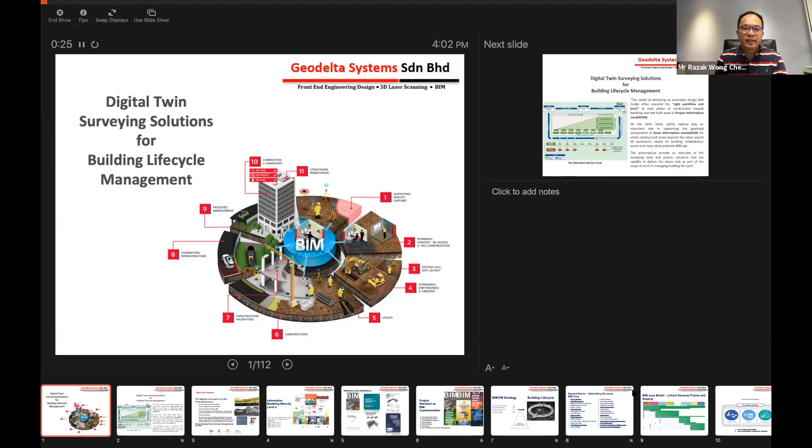For that matter, I think the picture in front here tells... As you can see, Mr. Razak, what we see is two or three, it's not a full screen slide. What do you see at the moment? See next slide, click to add notes. Oh, okay, just a moment. Maybe the screen share is not the right screen share. Just a moment. Let me share it again.

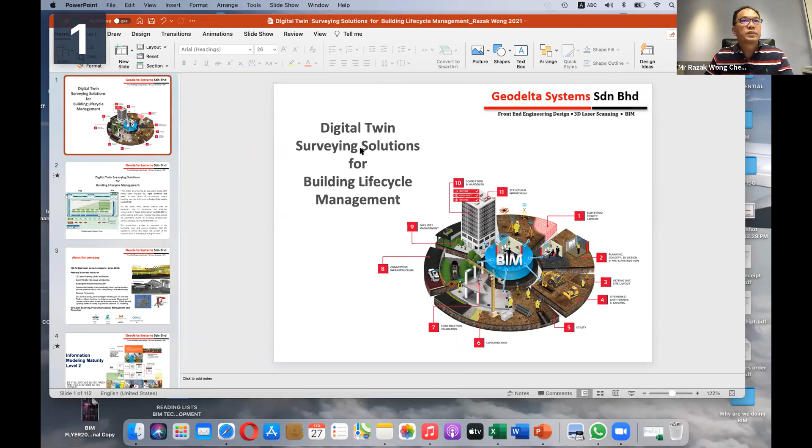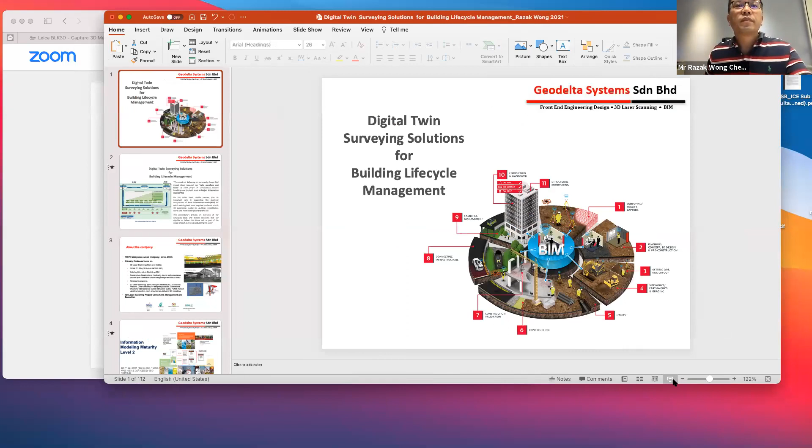Do you see the bigger screen? Yes. Okay, right, so you got a full screen now, yeah.

Right, so to the subject we are discussing today, I'm trying to relate surveying tools with the construction phase itself. You can see the numbers there, from planning stage all the way to design, up until construction and delivering itself, right? So how would surveying tools nowadays be able to assist, in terms of a typical modern construction, in terms of digital twin matters now.

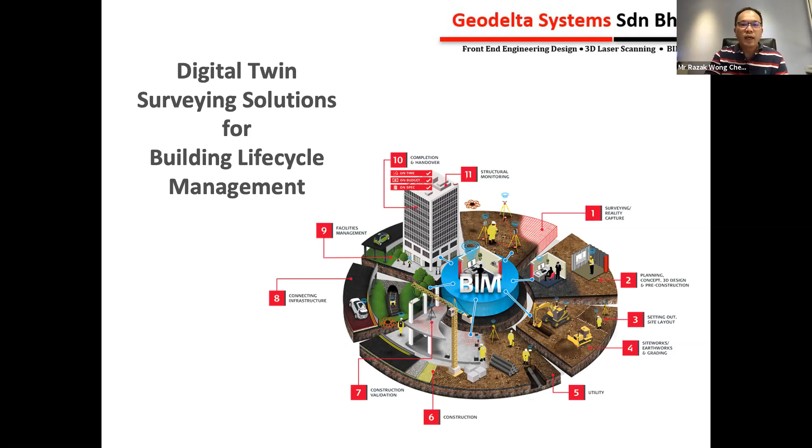Now in terms of deliverables, we have PIM. PIM in BIM terms is a project information model. Basically we're talking about a model with information itself, with the database, right? That's during the construction site itself. Now with that, we also have AIM, which is the asset information model. Now why I mention these two specifically is because...

I think for modern buildings, delivering a design model is not the problem, because we have all the digital design done in respective parametric modeling software such as Revit, ArchiCAD, etc. But then PIM itself, bear in mind, sometimes projects require as-built LOD 500. So how do we verify on that?

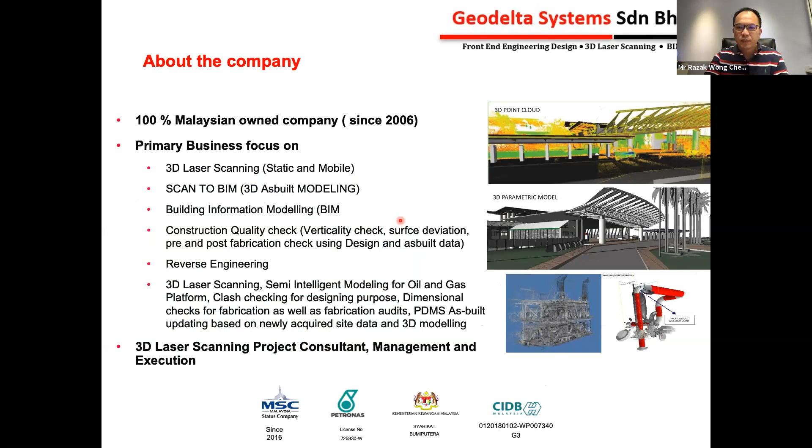Now, along the way, we also base our work on international standards. Also, we base it on some regional standards as well, and our local standard JKR. We are trying to converge the requirements so that we are tallying to the construction phase.

How it works? So, next slide. Now, first thing first, nowadays if you want to deliver a project, we need to have a strategy. Same goes for the tools that we use. Let me go down one by one. When you want to build a building, you will have an organizational strategy.

Then, after you build it, how would you like to utilize your asset? So you also have your asset information requirement for that. Then subsequently you come with your BIM requirement. You have your BIM requirement - LOD 100, 200, 300, construction model 400, all the way up to as-built 500. Then subsequently you have your asset information model.

Now come to here itself, how we deliver. Now then we talk about the construction life cycle itself. I would try to use it based on the BIM use. BIM use will be very common to the industry. We have lots of BIM use - so these are the list of BIM use: 3D coordination, asset management, etc, everything here.

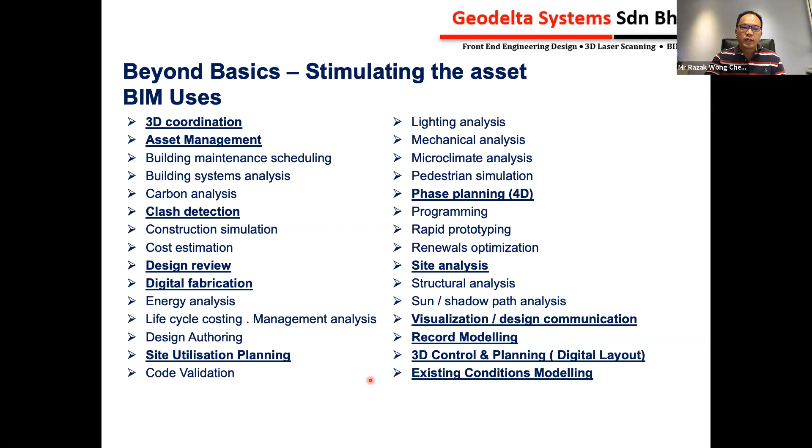From here, that's why I think along the way, in terms of the life cycle, this is perhaps where there are some tools along the way that surveying tools can come in.

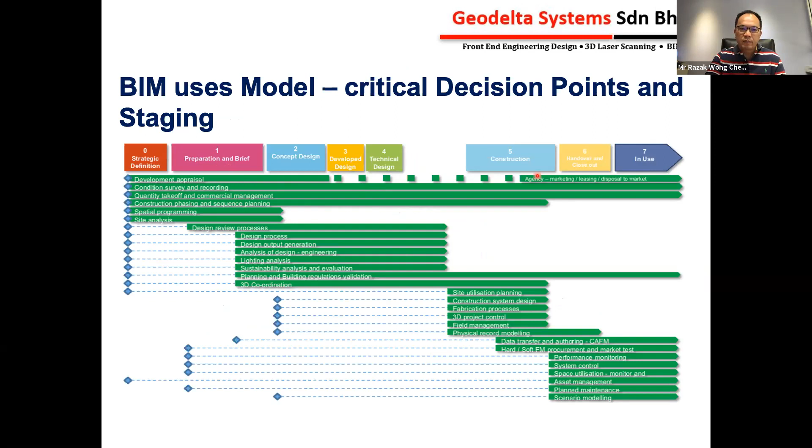Now, again, why I talk about the life cycle - BIM, I think we deal with three types of information. There will be graphical, the database, and documentation. So today, the surveying tools is addressed more towards the graphical model.

So we're talking about level of detail, because in our real world sometimes it's too complicated to model everything. So we need to be selective in modeling, because at the end of the day it's about cost effectiveness.

We have different levels of detail, and we had to choose one. In our past experience, most of the scanning itself can be done very thoroughly and quickly, but for modeling we normally choose a level of development. I mentioned level of detail up to 300, based on practicality and cost effectiveness, so it won't be very costly for project development.

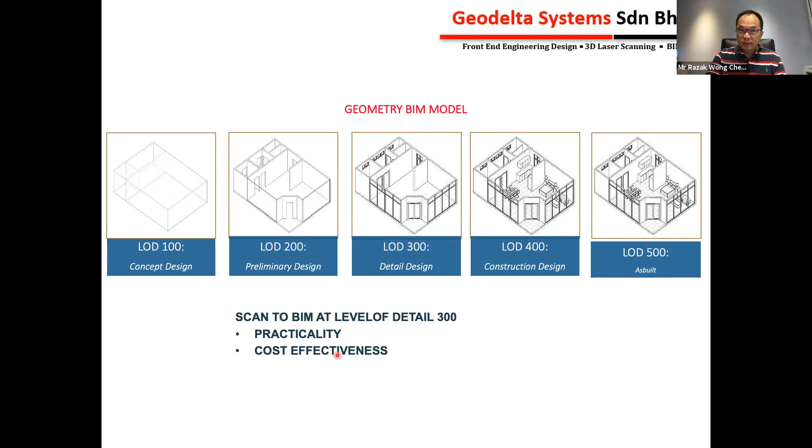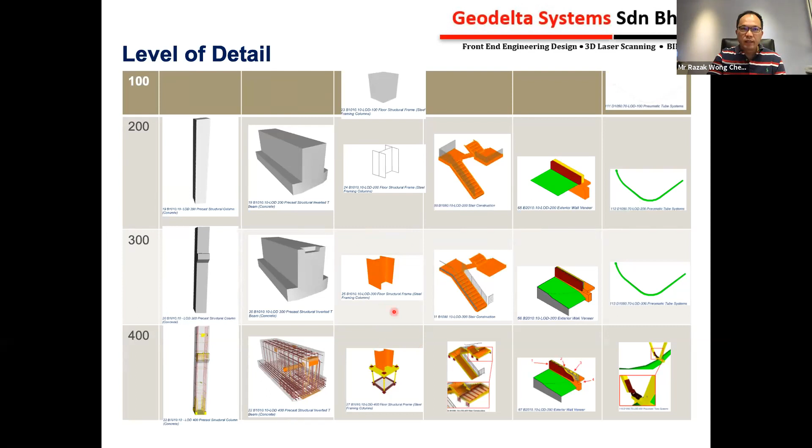So here are examples of why we choose 300 - it's enough to represent our real world environment. Not too simple, not too complicated, but just enough for engineers to work with. So there will be some examples of level of detail.

Today we're going to cover five major topics based on the respective construction phases, as you can see the whole construction phase here. I'll introduce some software that we use internally, so we find it, we are very familiar with it. That's why I mentioned the Autodesk products.

Then this data will come into the planning stage and design stage, where the architect or engineers, based on the landscape, perform the analysis or design.

Now the surveying tools come into play during the setting out stage, maybe grading, layout, building, and so forth, and also utilities, cables, power, and so on. These are the tools we'll be using along the way, so if we define it properly, there should not be confusion.

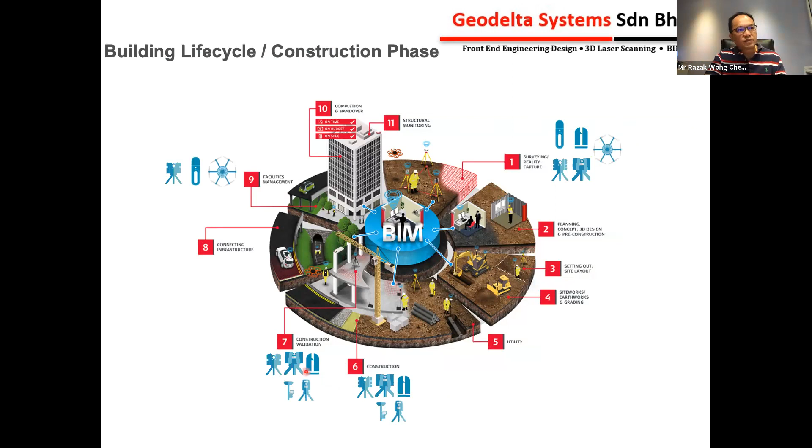Okay, quickly go on that. Now, this is what I'm trying to mention here. Scanners can be deployed during the early stage, during construction, validation, and FM side, for automation. Now, how does it look like?

This is the scanner. We have different types, I would say toys, because we have the backpack type if you want to go very large scale. We have the one on the tripod side itself, which can go up to 1 kilometer of scanning distance. This is all done in Malaysia.

We have this kind of picture, about 2 minutes scanning, 2 million points per second, a sample scan in our Shah Alam stadium. We also have a lady holding a very lightweight scanner, you can see a lady also can do the scanning, very easy with the tripod.

This scanner may need guys to carry, it's 14 kgs, a bit heavy duty. But for this other scanner, it's very light, just 1 kg itself, so ladies can go in and do scanning to do verification. So it's equal gender for that, right?

And we also have the handheld scanner, lots of toys. This is maybe for large scale mapping, for mobile scanning itself. Now the next picture I'll show you, so-called a quick one.

How it functions, a bit technical here. It's able to collect thousands of points per second, and able to rotate 360 degrees, moving 360 and 270. It's got a camera, and has a very short scanning time. This is for the static scanner, you see it on a tripod. This is the type, and these are the various ranges for that.

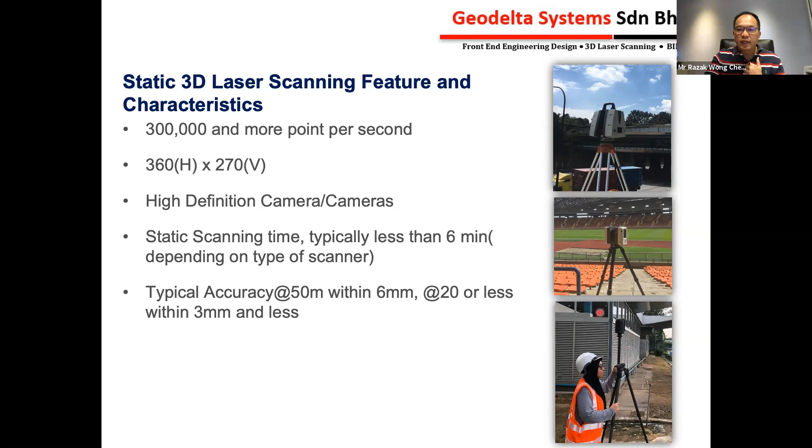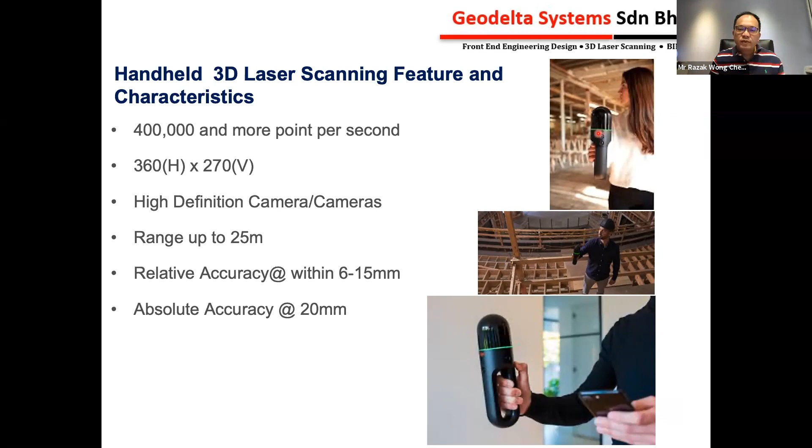Then we have the handheld type, which is a new technology. It has got the IMU inside, you can see a lady holding it, very lightweight, you can walk and scan itself. So you can scan the entire floor very quickly. This is good for maybe air networks, whereby they want a quick layout drawing.

Then we have the large scale, more canggih scanner, whereby if you want to go for a larger scale, we can run like 50 to 60 kilometers per day. So that's for infrastructure type, if you need that. But mostly our experience is dealing with static scanner and handheld scanner.

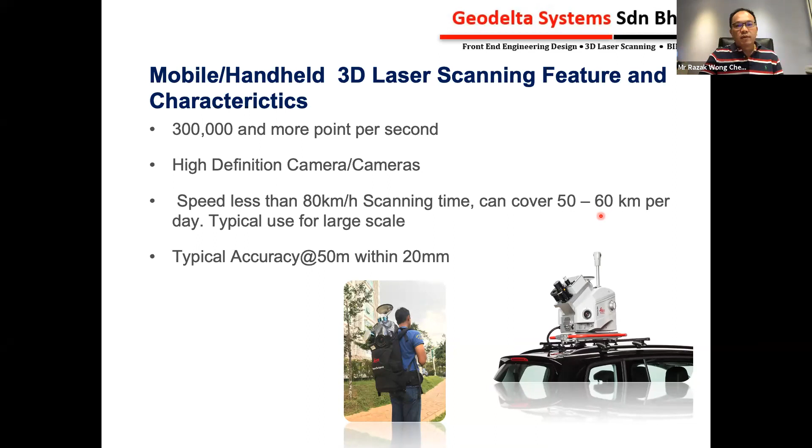Right, skip that part. So these are some pictures I'd like to share with you. On the left and right-hand corners, this is basically a scanner result, scanned with color pictures, just like Google Street, right? So basically you scan and this is what you get, because it's superimposed with the photo, and you see, wow, you are in the location itself to scan it. Now from here, we will be doing the modeling, almost there.

Okay, we have the so-called structure, the walls, the piping, the floors. This one we do generically because we don't do the detailed modeling itself, because maybe LOD has a different definition. On the right hand side, the cooling tower itself is almost the same.

This is the site, and this is the model. So if you have any projects come across that need scanning, this is the mechanism you need. You can go and scan it, scan lots of points, come back and deliver it, maybe do the analysis work itself. Very useful for that.

This is, in fact, an airport overseas. We scanned the entire airport, almost about 700,000 meters square. It took us about 2 years to complete the project, covering all systems like architectural, structural, and also the M&E side. So we have good experience to share, more practical experience for that.

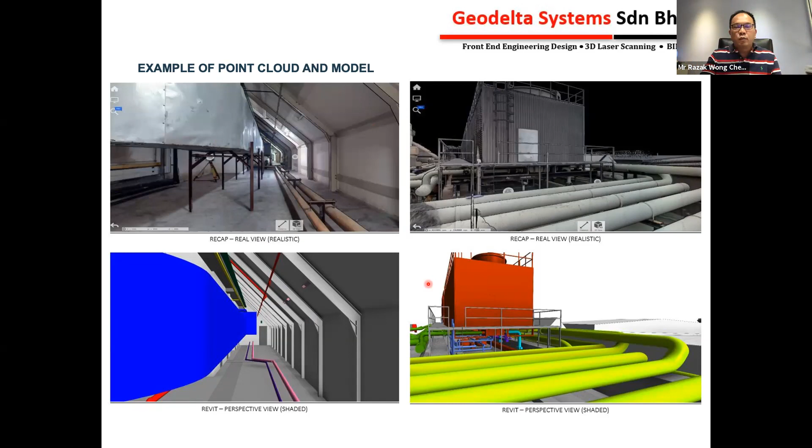On the heritage side, we are also very keen because Malaysia is full of multicultural places. We have opportunities to scan places like mosques and temples. You can scan it with the new tools and software, and then embed it to make it like a virtual tour itself.

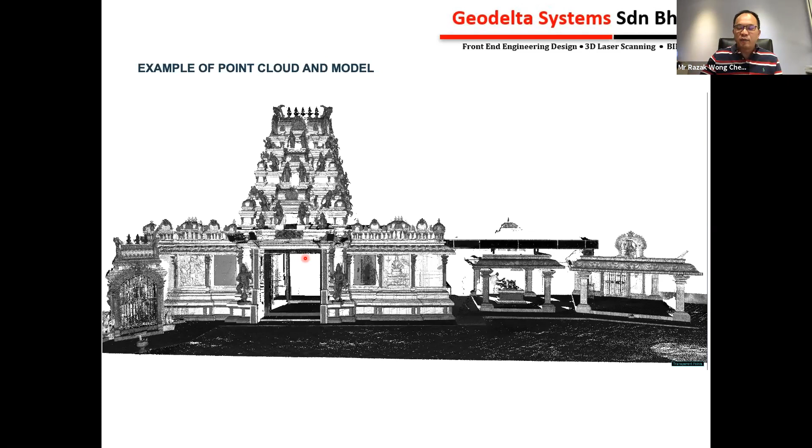Especially during pandemic time, with no place to go, I suppose we can put this up as a virtual site. Perhaps that will promote and attract more tourists to our country later on, in preparation for post-pandemic. I really hope so. And then at Tugu Negara, we can scan that as well.

This is on the left-hand side, and this is the scanner result that we have scanned to come with that. In fact, this can be modeled out from there. Now let's talk about shipbuilding.

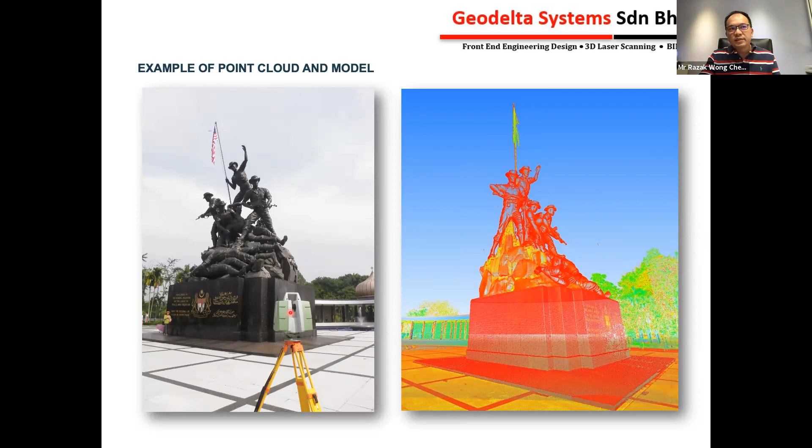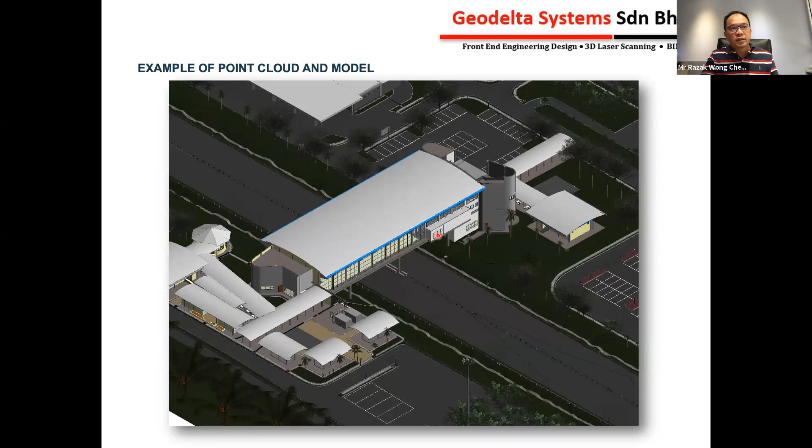For Malaysia side, we have a lot. This is an example for Plus. We have scanned a couple of R&R buildings, inside and outside, and this is actually derived from the point cloud. You can see the rooftop, the structures, the mirrors, walls, and so forth, all derived from the scanning results.

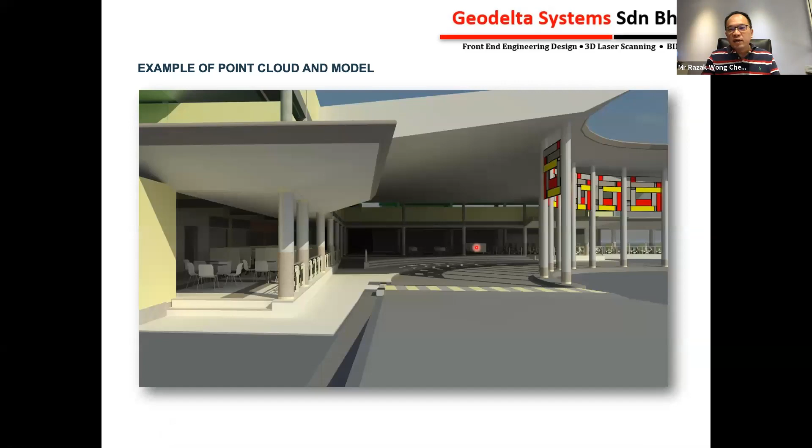Now subsequent examples can be enhanced. I'm sure this may be familiar. This one is somewhere in Sungai Buloh, an R&R. If you drive there, something may be familiar. I think as Malaysians we may be familiar with that. This is some spot.

Same area, inside the cafeteria. And this is another area in class. I'm sure you're familiar with it, from the walkway coming here to the surau area and toilet area. This is what we derive, and this is also somewhere at the Seremban area itself.

Doing scanning, you can get the ceiling and the so-called interior structure, including mirrors and so on, based on the real-time current setup for that. So this is very typical.

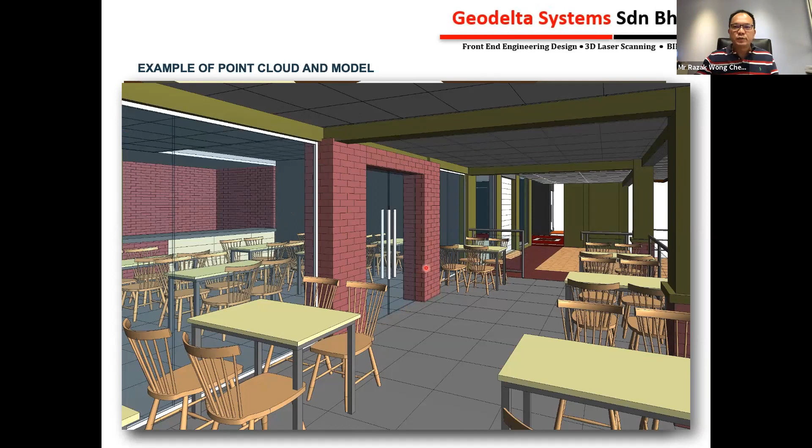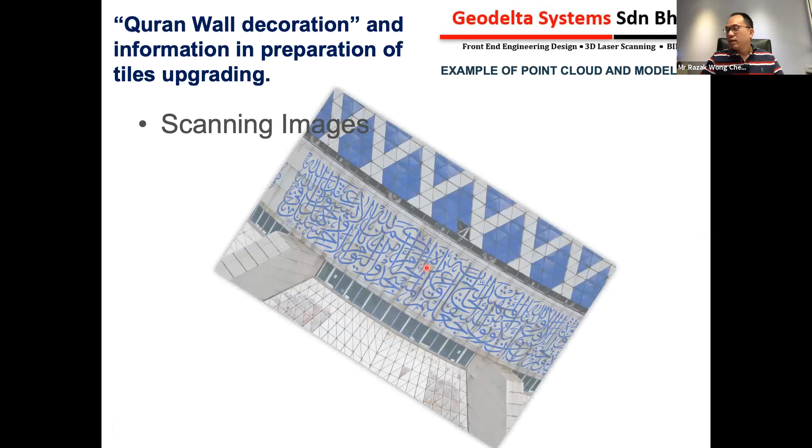Now the next example, which is very interesting, is the Quran decoration in Shah Alam. I'm sure this is also very famous, familiar for us. This was back in about 2014 or 2015. I think the problem was they didn't have the as-built drawing for that, so we deployed laser scanning.

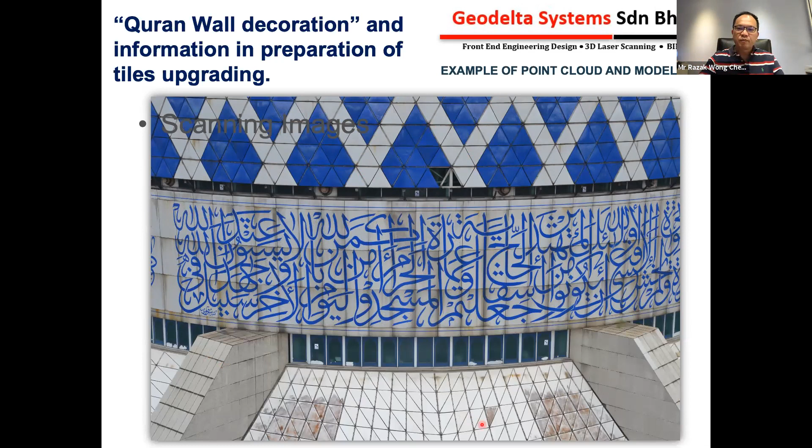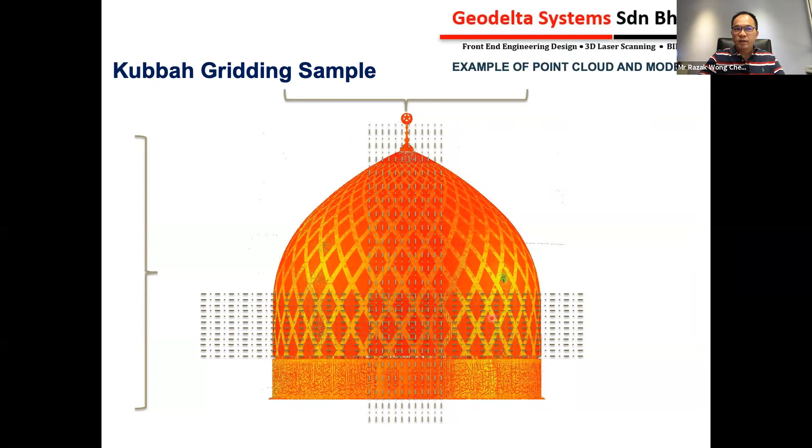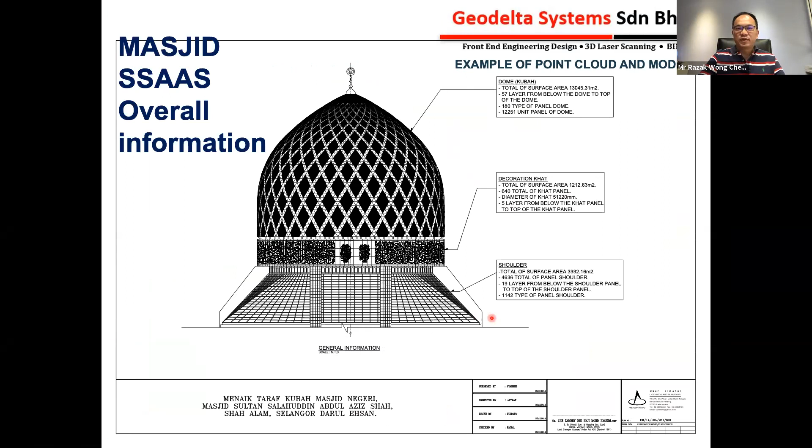And then this is where the panel - you can see that? The panel is how we derive the panel drawing itself with the so-called pattern. That matters. And then this is the whole entire dome, the masjid's dome, that we are trying to do the gridding system for, deriving the position, and finally coming up with the execution drawing for that. This is for Malaysian examples, not somewhere overseas, so it's something we're proud of for local examples.

And some other examples, like a school - you do scanning, then you do the so-called architectural drawing. This school wanted to do expansion but didn't have the drawing, so we scanned it. At first they wanted to do a traditional survey, but it's impossible to get this kind of detail. So we deploy a scanner, and then we draw elevation drawings and section drawings based on Revit, and derive the 2D drawings.

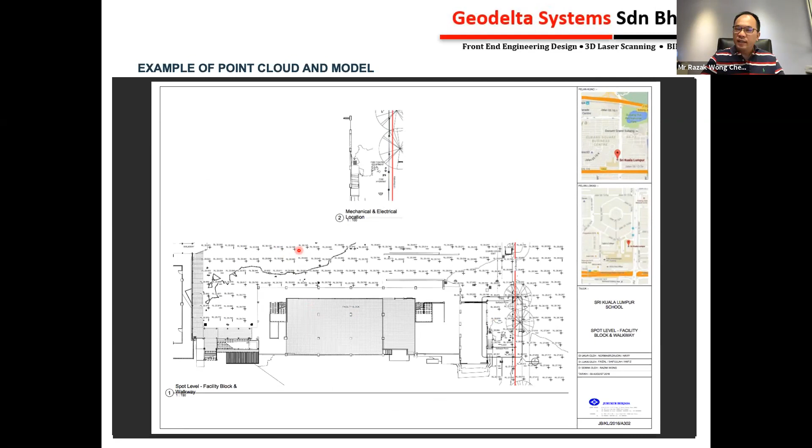And of course you can see this topographic data - we didn't survey this because we got it from the scanner point cloud itself. We can do up to half a meter contours, one meter upwards, very easily. Most importantly, we are no longer dealing with 2D - we can deliver our design in 3D because it's all done in Revit.

So with that, I would like to share with you a workflow of how we deliver from point clouds to 3D modeling. Just now was to give you a flavor of how it looks, a quick preview first. Now let me share with you how we actually do it.

So we would utilize scanners, do the location scanning itself, then survey it so we have a proper coordinate system to merge properly with the boundary and so forth. Then we process the data, merging all the files because we've got so many scan points - sometimes one building would have 300 to 400 scanning points, and the data size could be up to 1 terabyte. It's pretty big - we're talking about big data and analytics, but applied for architectural and surveying purposes.

With that, we would do the modeling according to the project requirement. For example, we have architecture, structures, or M&E. Every project, if it can be defined in terms of requirement, we will deliver accordingly. Mostly the projects we deliver up to basic architecture and structures because clients say they just want a layout, a quick survey.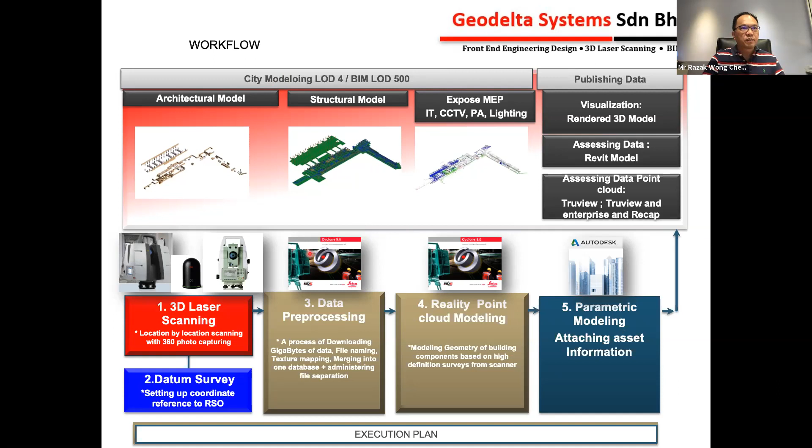So this is how we deliver the workflow, in terms of step by steps, pictorially. We have a site, we scan it, we merge it, we model according to the point cloud - here you can see it's either structures, interior, special equipment, or M&E. Finally, we get the results.

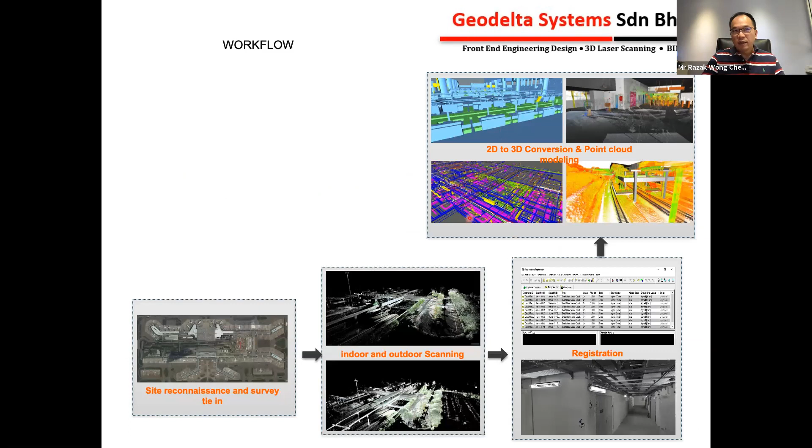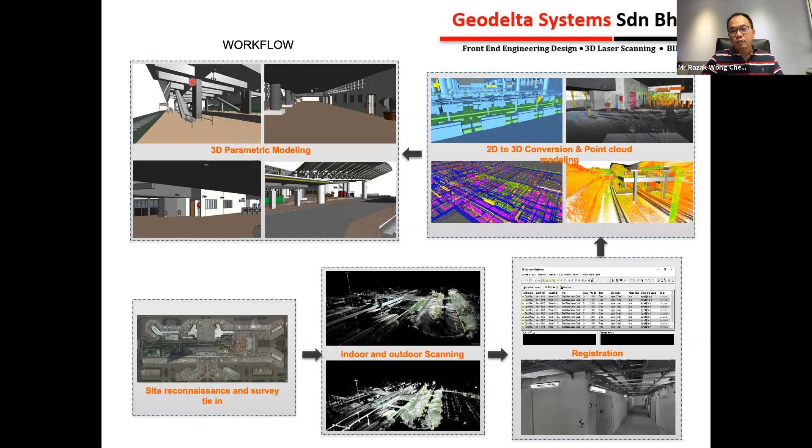So think about it, this comes to managing your asset itself. We scan it, we get the catalog, we build the catalog itself, then we can deliver as a BIM model for FM purposes. Okay, so that's a good part of that.

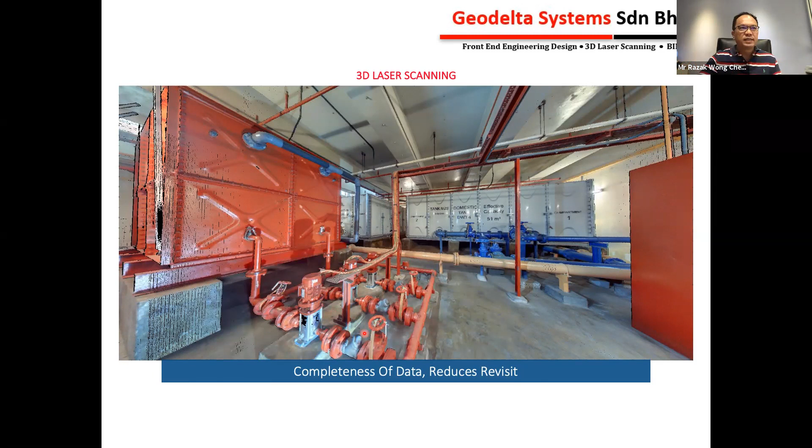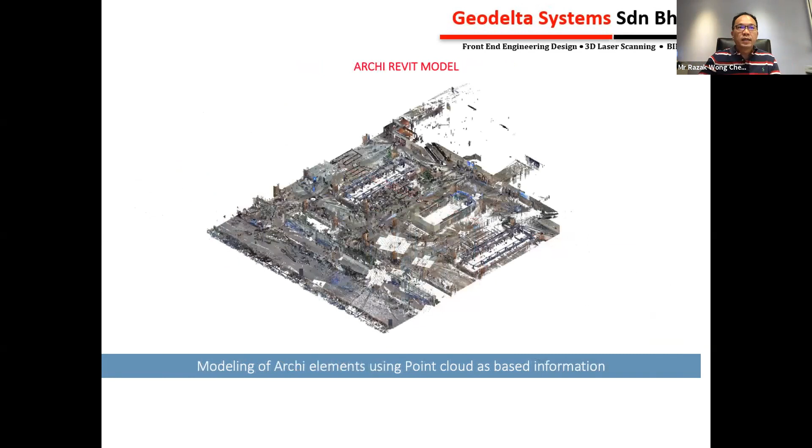This is a door example. Scanning, we model it, then we have the model. Subsequently you can do more enhancement in terms of making it more colorful and so forth as an alternative. Now try to show you this is the point cloud, how we model it - you see, this is the results.

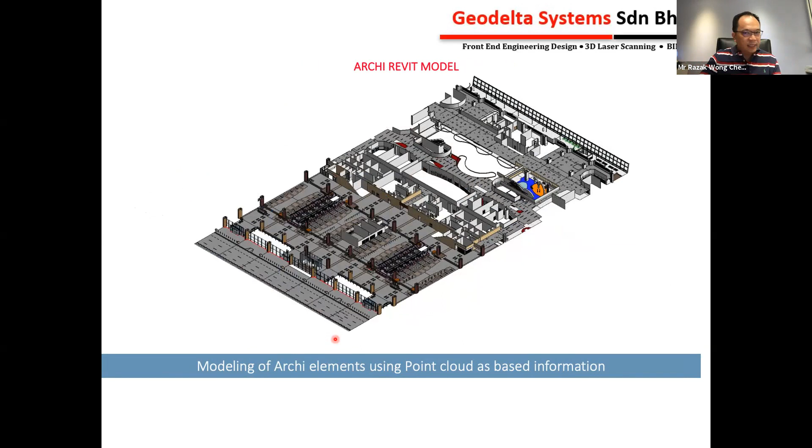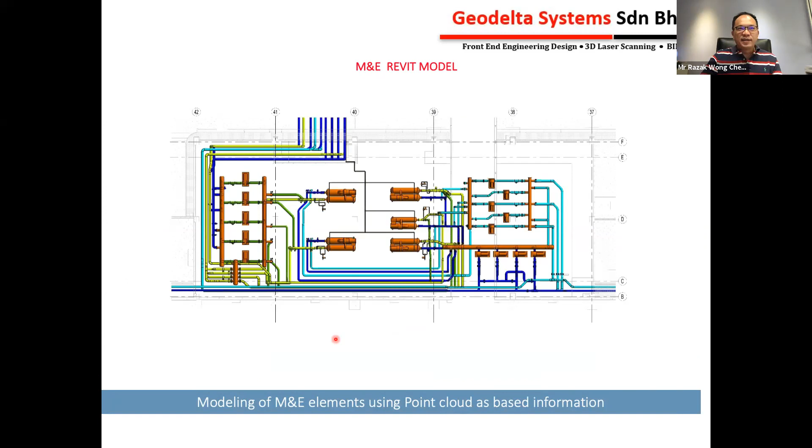So these are the pictures - you can see this is the external part of the airport itself, been done by scan to BIM.

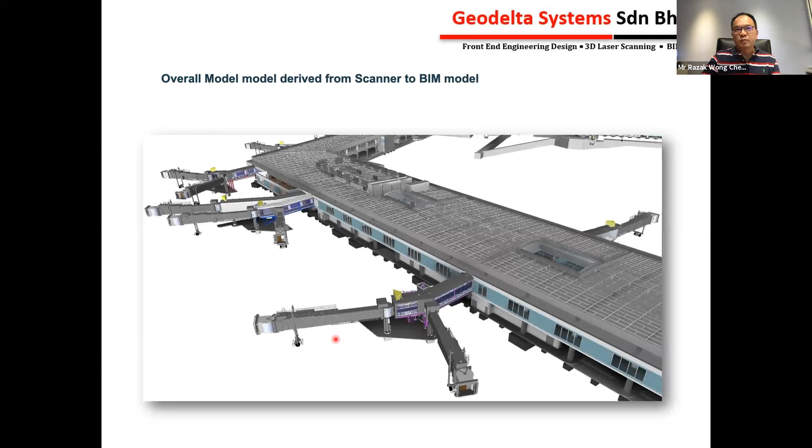Now quickly moving on, I think we have less than another 15-20 minutes. I'd like to talk about how to deliver a drawing precisely. So we make use of the BIM to field solution - you can specify this in your BEP or your EIR, try to use the BIM to field solutions.

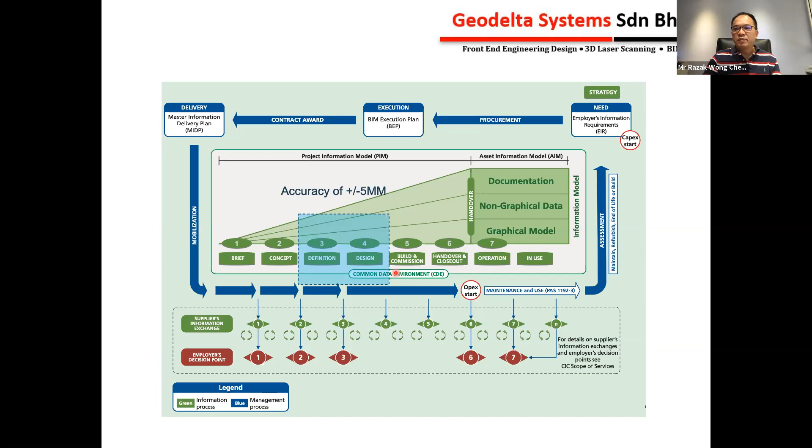To do what? I'm trying to highlight here, we have a very thorough cycle, but when we deliver, it's off 3mm, or maybe 30mm off, sometimes half a meter off. The architect wants to deliver accuracy plus minus 5mm - how to do that? If it cannot be done, the design is basically wasting time because it's not delivered accordingly.

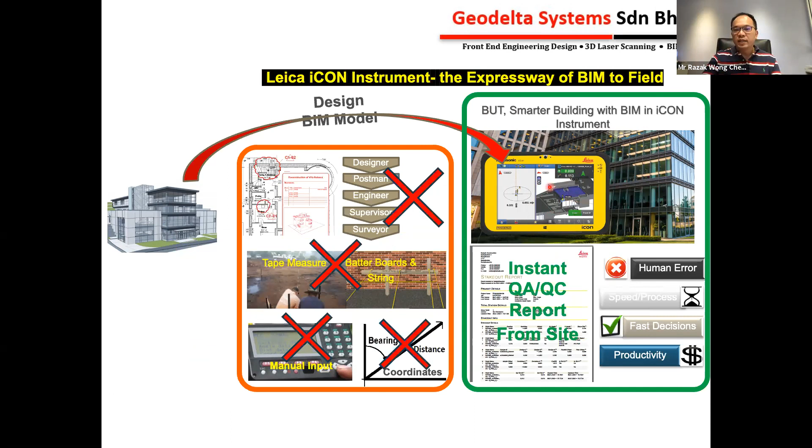So I'm trying to talk about equipment - from your model, bring it into this equipment and let the equipment survey accordingly. This is the model done by the architect, so it will be surveyed accordingly and not just through a 2D plan. It can be done by multi-formats, with this equipment, a BIM to field solution.

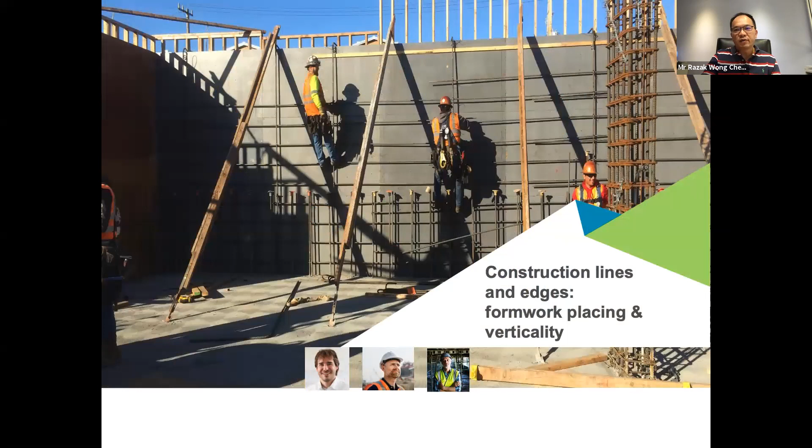You can see the panel here can have the graphic point in there, so during construction site itself, we no longer confuse in terms of delivering exactly to the build. This is the message I'm trying to bring to you - there is a BIM to field solution, appropriately to be deployed.

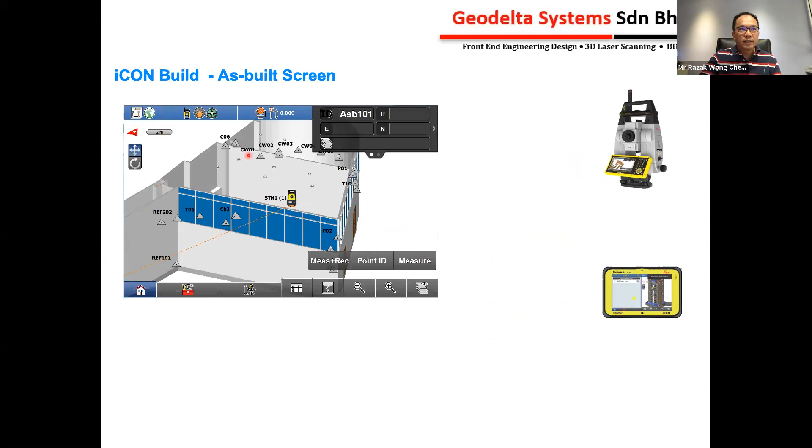You can see this is the model survey equipment - this is the building, the multi-story. So we have this one in the so-called reference, and build survey according to that. Just a very quick short one because it's a touch too technical.

The next one, I'd like to share with you a gadget - this new gadget, like a handphone here, is called 3D imager. It's very good, it's got three functions: you can measure distance, you can take pictures, you can take measurements from that, and then you can measure 2D and 3D. This will help - traditional method, you see a guy taking photographs, going back and doing some measurement and so forth.

So we make use of this little guy - take a photo, upload to BIM 360 itself, then it becomes your tool.

When you go to site, you don't have to argue with your client or your subcontractor. Take a photo, snapshot, hey this one's size is not correct. Can you change your spec? Why? How do you know? Yes, this one is already smaller than the spec requires. This way there's no more dispute. And then you can have your layout map and try to document it.

So basically it's a calibrated camera, okay, called BLK 3D itself. It's quite small, just like a handphone, like an iPhone 12, that size. So this is how it looks, okay.

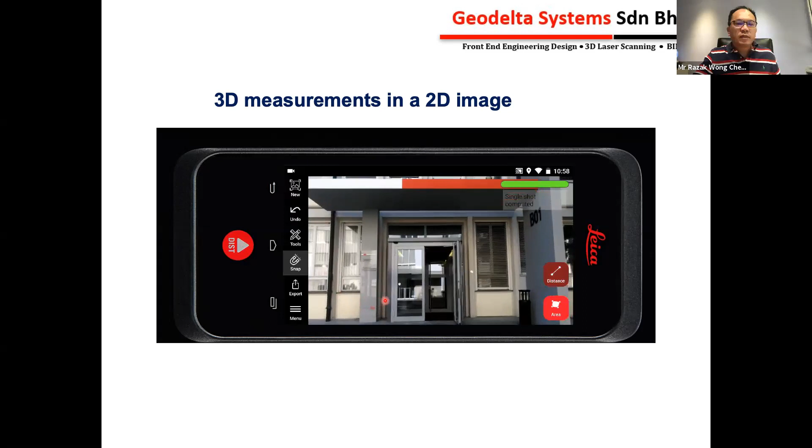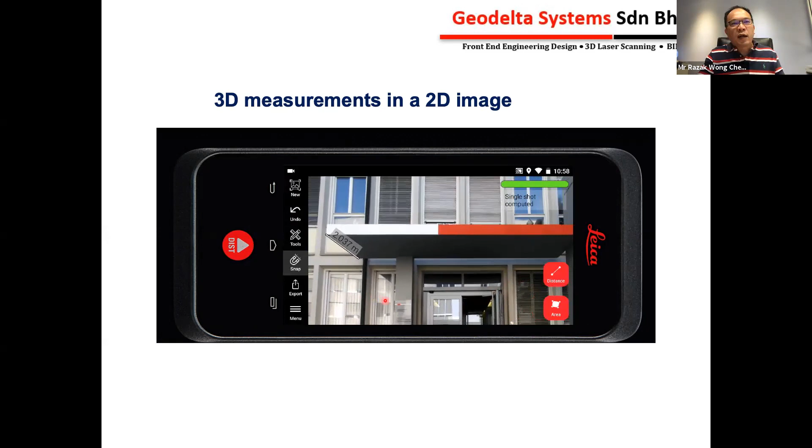Let's play the video for a moment. So this is the video, okay. You can zoom in and then take measurements on the spot for that matter. Quite a nice tool, especially when you go to a remote area far away, come back to the office, and you don't have the measurement, then you have to take the next flight and go back to redo it again.

An iPhone can do it, but it has to be done in real time, so maybe not as beneficial. So look at the BLK 3D imager itself, that helps with that.

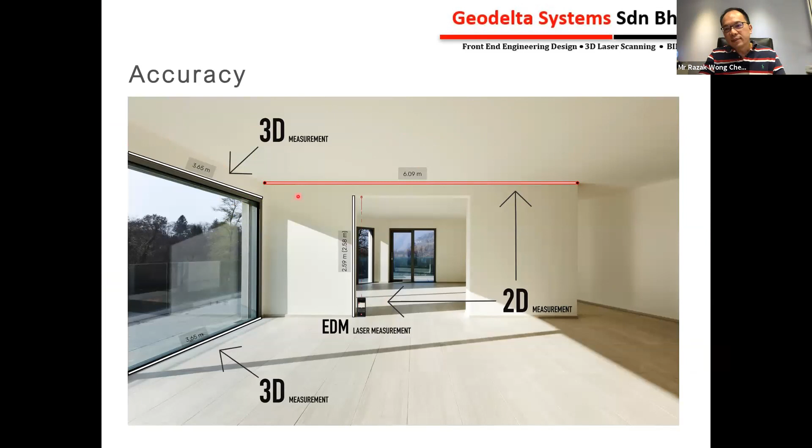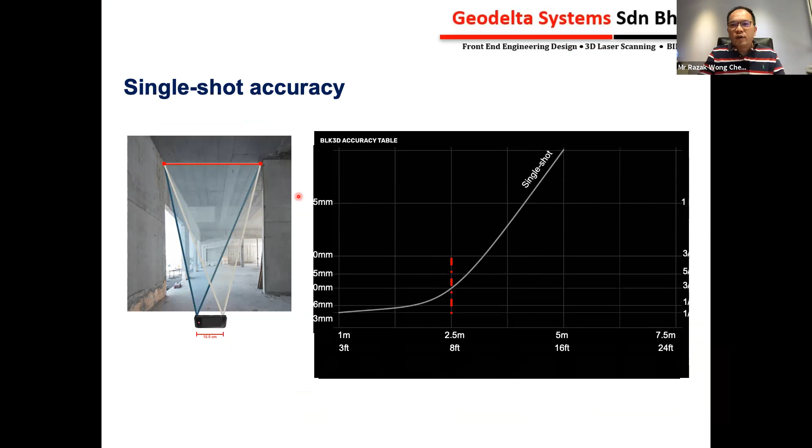A lady can carry it at the neck, just do photography, and the results can be measured in 2D or 3D. It can do just 2D, but slanting also can, for that matter. The accuracy is within about 6mm, okay, which I think is sufficient justification for that.

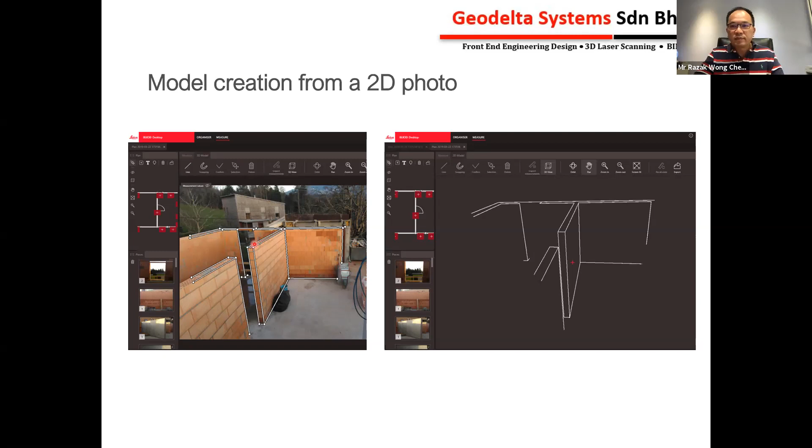Quickly run through that. Most importantly, you can manage your photos, and you can also build your measurement in terms of 3D. This is a 3D for that matter, and you can do a layout for it. If you don't have any tools for that, for a site visit, it could be quite good.

Overall, I'm trying to say that it will help to document sites. You can do sharing, and also respond to the actual situation for that matter.

I think in short, I'll just skip through this one. This can just put some tagging. You can have your layout map, tag the photo itself, so you know where the locations are, so that you can justify it in terms of real-time reporting.

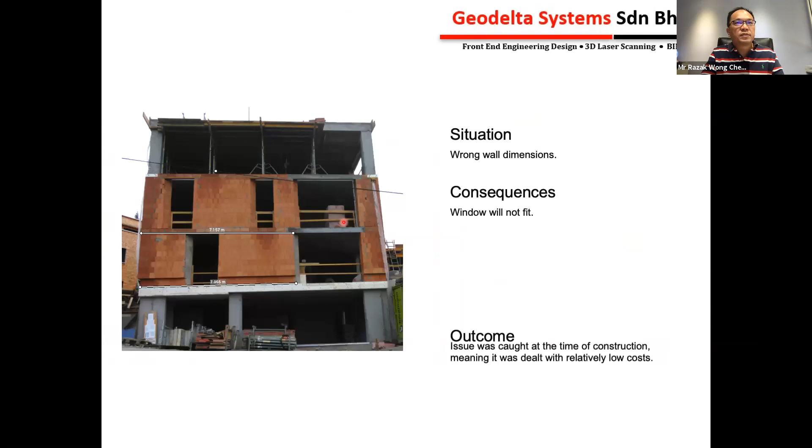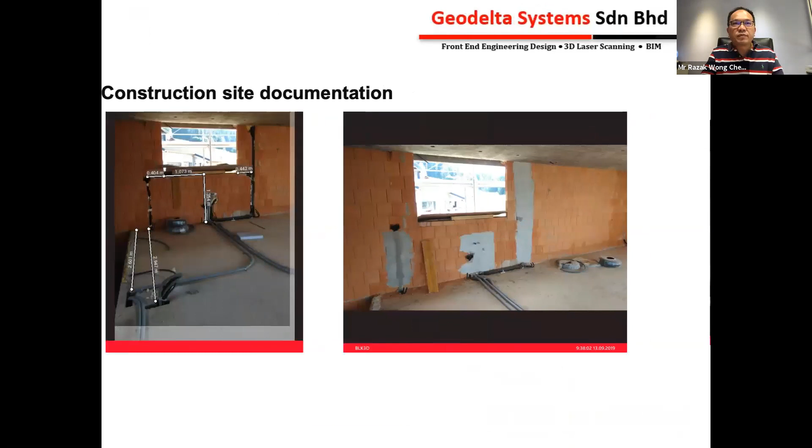Let me just skip through this. Some pictures, right. These pictures justify typical scenarios where you're able to do some measurements from the photograph itself. Most importantly, you can relate this to a BIM 360 doc and do some reporting for that.

I'd like to go to the next one, which is more interesting: the images and point cloud processing. These pictures on the right-hand side are real-life pictures, just like a photo. On the left-hand side, if you want to bring our model into virtual reality, we take lots of photos, then bring the real side into the model itself. You see, it is very difficult to do the modeling here in real life, but with pictures and measurements, it can be done very nicely.

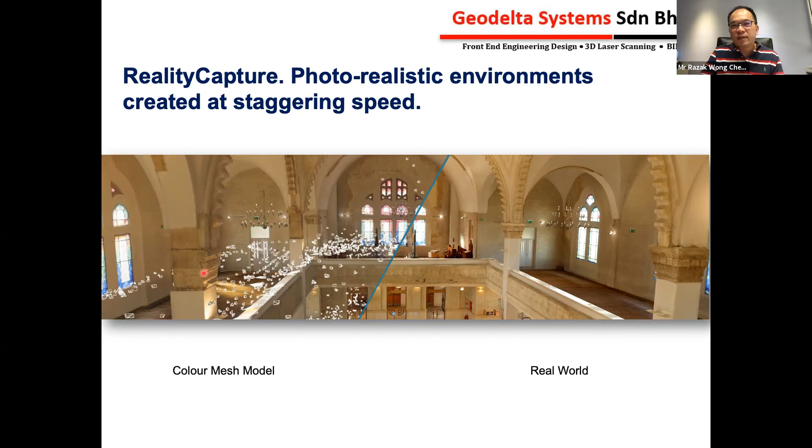Just take lots of photographs. So imagine we have a heritage site, we want to scan inside and outside, all can be done. Do a proper HABS 1, HABS 2, HABS 3 kind of reporting, which will make you different from other so-called practitioners.

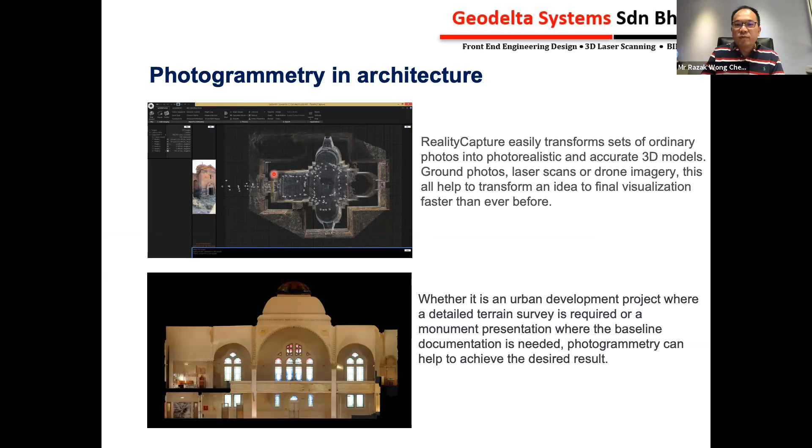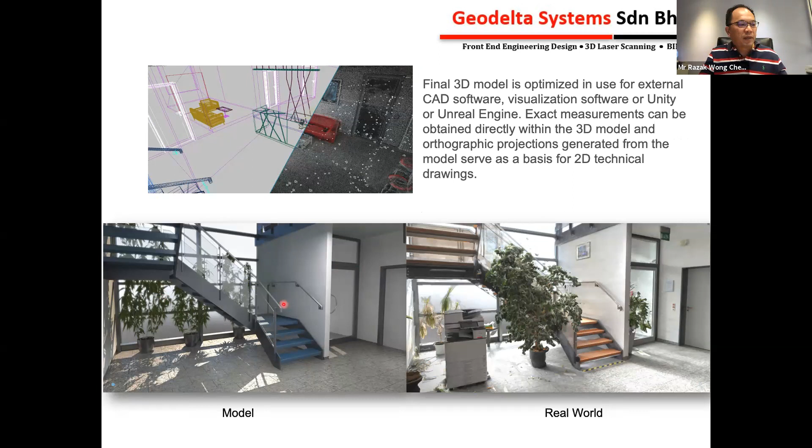So these are some examples, and you see these examples of the real life photo and also the model photo for that matter. You can see that both are models being created using photographs, which can be done outside and for indoor as well.

You can contact me, I have some good examples that have run online. You can do a virtual tour, which I find very beneficial, either for tourism or for architecture. So all we need is a scanner and a photograph, and a camera can be used as well.

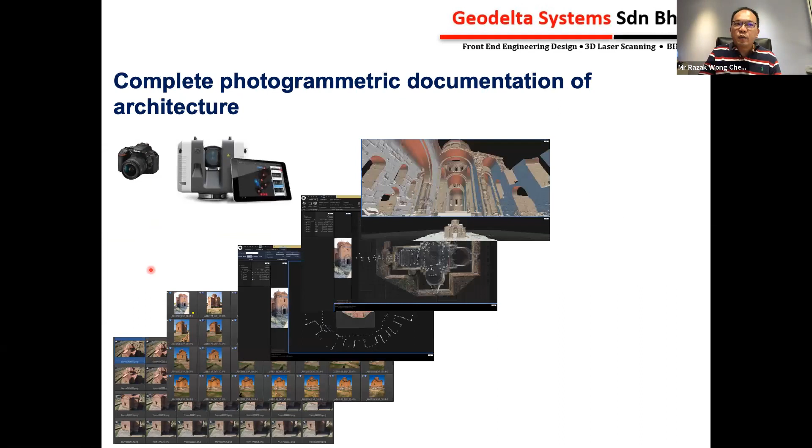So what we do is take lots of photographs, inside and outside, then put them inside the software, merge it, and we get the data itself. So this is the process. We just need the software, then we get this kind of effect of the situation. Of course, lighting is very important.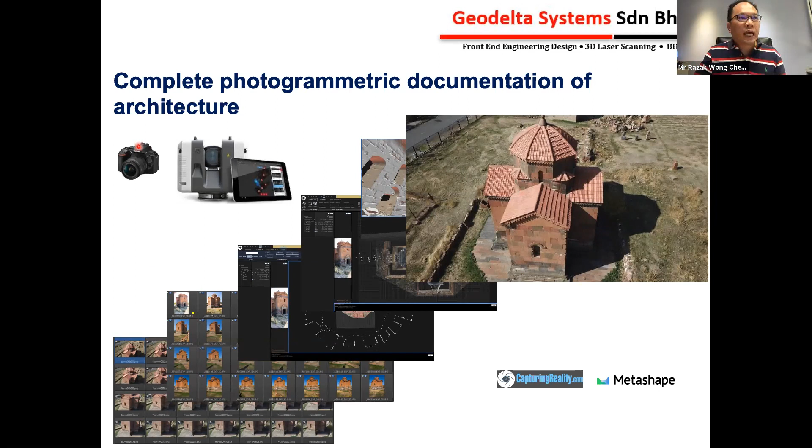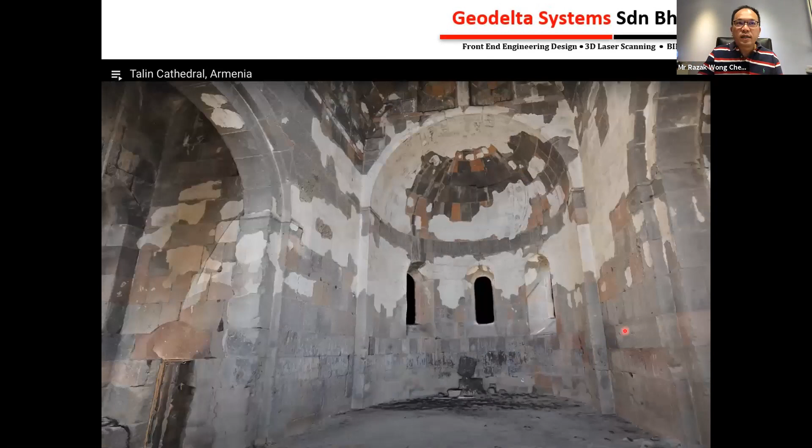So we use the camera, the scanners, and this kind of software for that. So next, these are some pictures taken using the same methods. This is not rendered, but taken using the same methods, to give you almost a 3D walkthrough. I'm not doing the walkthrough here because I'm scared the line here gets stuck. So I'm just showing some photographs for the method.

Yep, okay, not done by us, but done by overseas examples. So locally here we're also starting to embark on that. Right, so I think that touches on the four items.

The last one is actually what I'm trying to emphasize. All this data collection, we go from the point cloud to do the modeling, and finally we perform the parametric modeling. So just now we talked about the graphical model itself because we scan it, we model it, right? So how do we add intelligence into it to become a BIM-enabled parametric model?

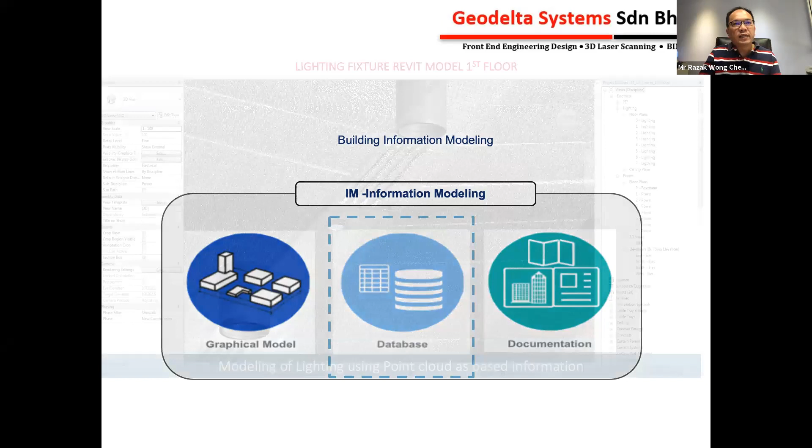So basically it's all done in the respective software, ArchiCAD, Revit itself. So all this is being done. Example, the light just now. So you just have to put in the respective information so that your data is intelligent enough to be used for FM for that matter.

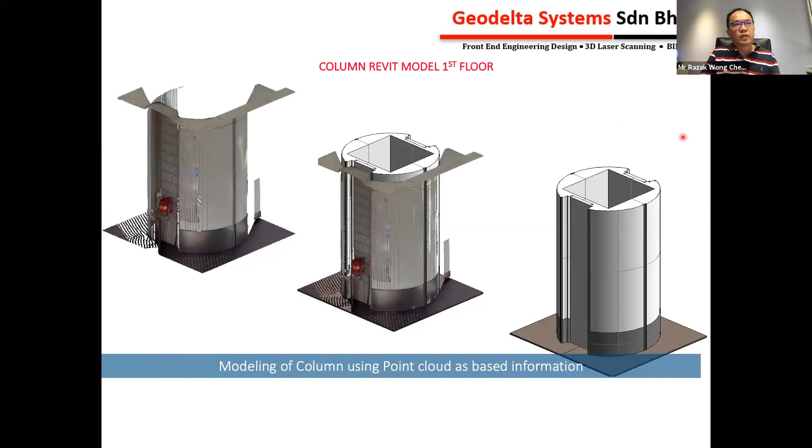Okay, example for that matter, same goes to the pillars, the doors, firefighting, the rating, the door name, the brand name, maybe the maintenance for that matter, space management you have for your client to manage the commercial contract for that matter. Because it comes in very handy if you have proper sizes, because then you don't have a dispute with your client - hey, you charge me so expensive but it's less than 1 meter square, so they come and sue you. Sometimes it's not worth it.

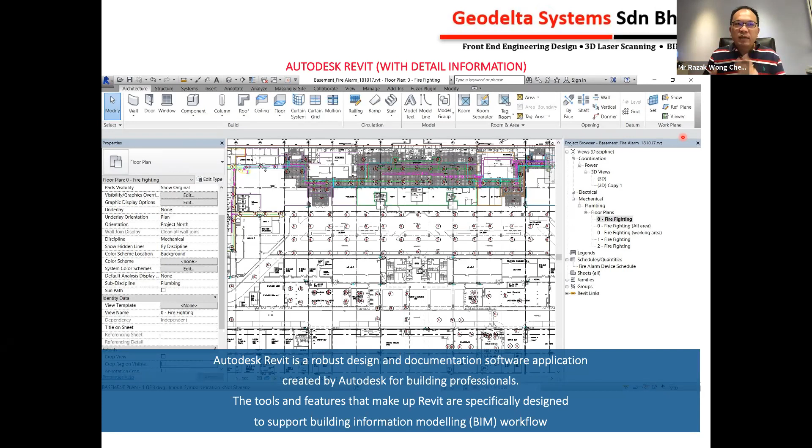So sometimes from that point of perspective, reality capture comes in very, very handy for that matter. Of course you can have your so-called - I think as an architect you're very specialized in that, so I wouldn't talk more on that.

So now let me try to say the conclusion here, quick one. So I put back this slide because we have a BIM strategy. Make sure that if you want all these tools deployed, make sure it's mentioned inside your organization strategy first. Mention it first, specify it first, so there's no dispute, and clearly set out the potential situations that can be done by this sort of technology for that matter. So just think about using the right tools, then your whole project entirely will be delivered smoothly.

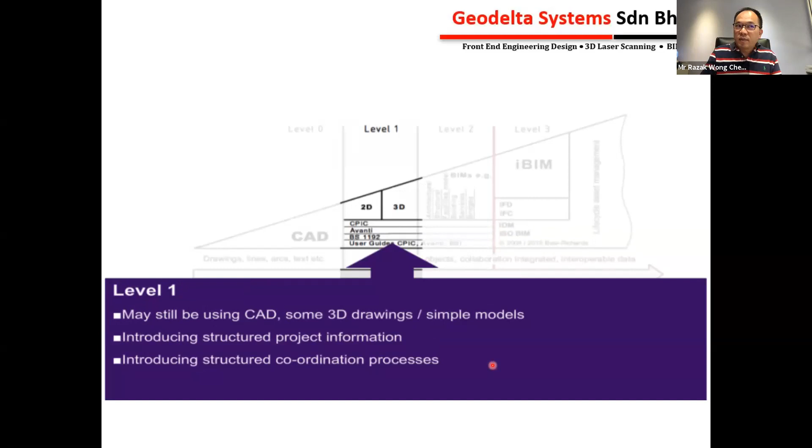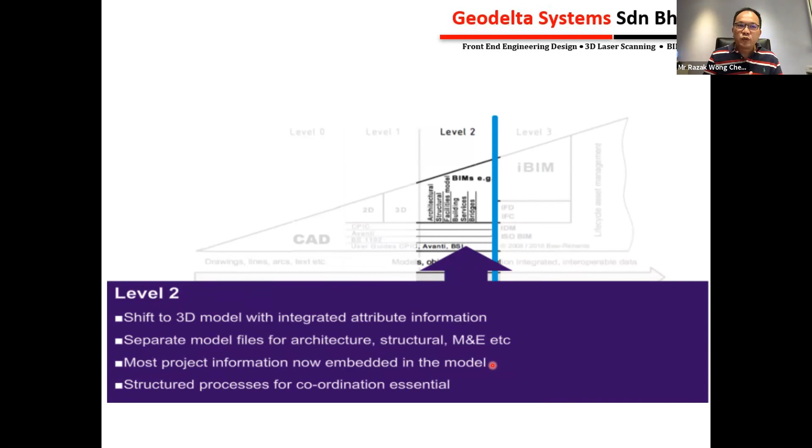And of course, we are moving away from level 0 to level 1. Level 0 talks about 2D CAD, right? Level 1 talks about CAD, maybe 3D model itself, and I'm sure mostly you hear about BIM level 2. So with that scanning, with those images, updates and so forth, slowly the industry will be moving towards BIM level 2. So we're talking about the right tools deployed at the right place.

Last but not least, we have been practicing this so-called BIM scan-to-BIM, scanning itself, to start with, since 2006. There wasn't much acceptance in terms of technology, but of late, CIDB, JKR, maybe some of the local requirements are gradually accepting scanning as part of the deliverable itself. So I would say we are progressing in the right direction in terms of the Malaysia context for that.

I think just in time, 4:45. Okay, I thank you for the time for listening to me. Maybe I was talking too fast.